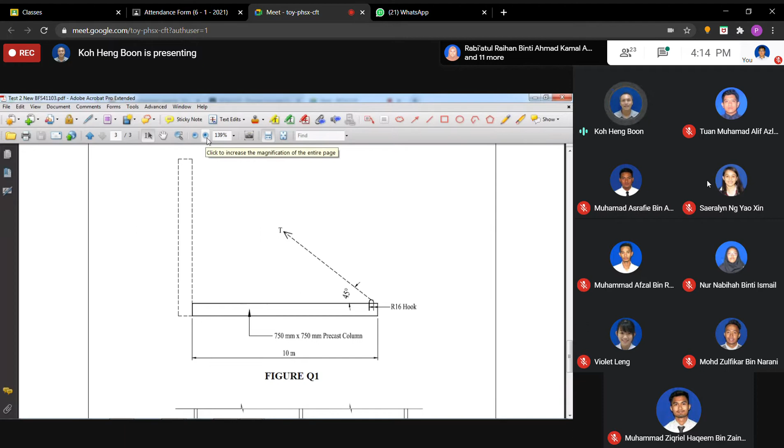Question number 1 is a bit tricky, you have to go back to your fundamentals to do the design to solve this problem. Okay, so look at these questions.

Question number 1, this is a precast column. At the end here, the length is 10 meter, and the size is 750 mm square.

This column, we are going to design the hook here, meaning we are going to check the hook, giving you the tensile strength of the R16 hook and also the partial safety factor.

And the column is going to lift out with a 45 degree. Suppose the hook follows the 45 degree, it would be much better, but it's okay, it's going to lift it like this one.

So now asking you, is this R16 passed or not? Okay, it's another submitted take-home quiz.

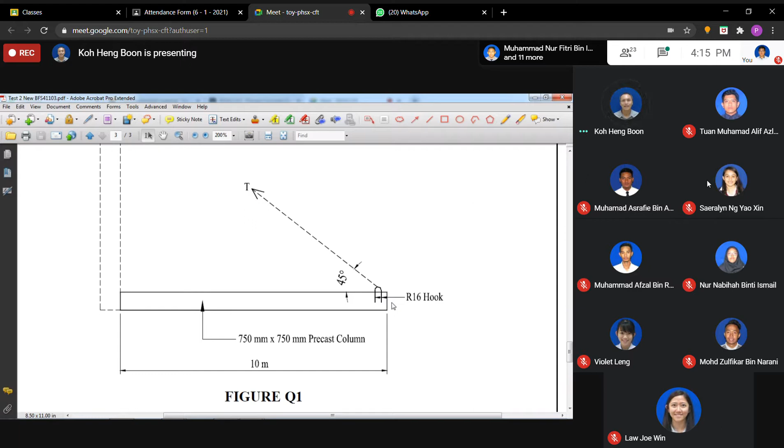Okay, so ask you to solve to get this one. So basically in this kind of situation, you need to get what is the force applied, and if you lift it out, basically this will be in tension, and there is two legs here.

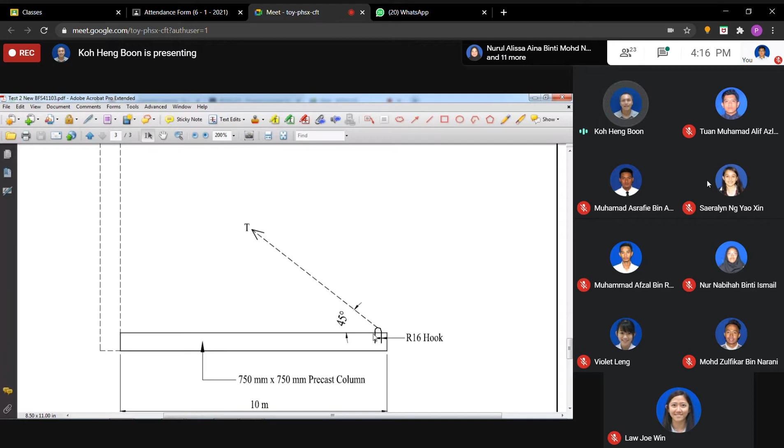We ignore all the bonding and so on. We assume the failure is on whether the tension capacity of the R16 hook is sufficient or not, and giving you the strength. The tensile strength is 250, and partial safety factor for the steel hook is 1.15.

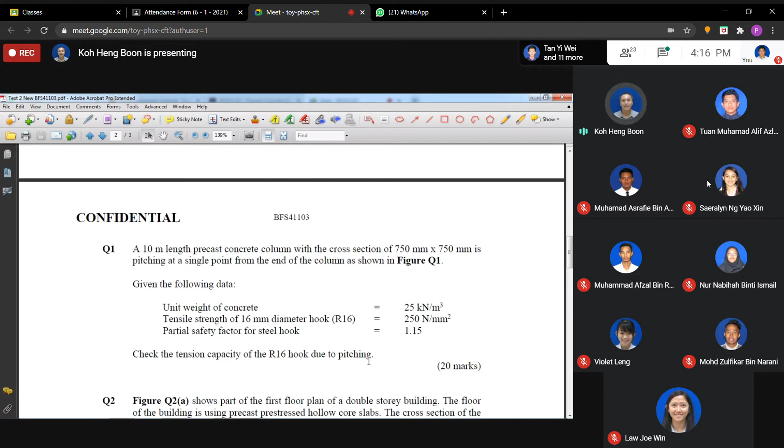Okay, so how to solve it? Actually it's very straightforward for you, and for me the solution is not very long.

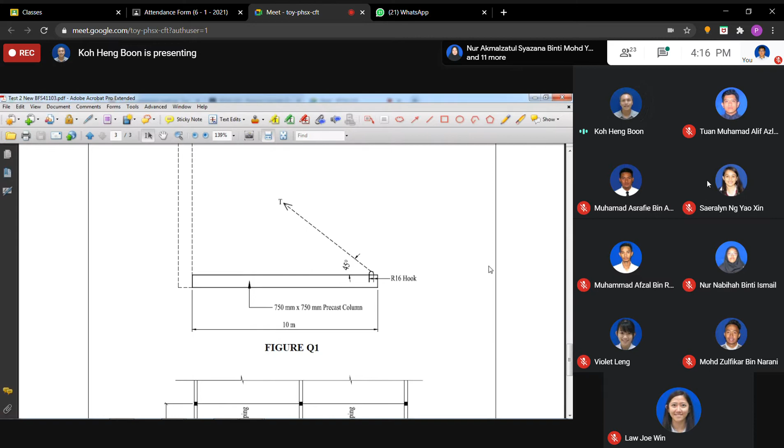So basically this one is something like if we lift it out, if we draw out the free body diagram, let me show you the answer scheme. Let me check the answer scheme for test 2.

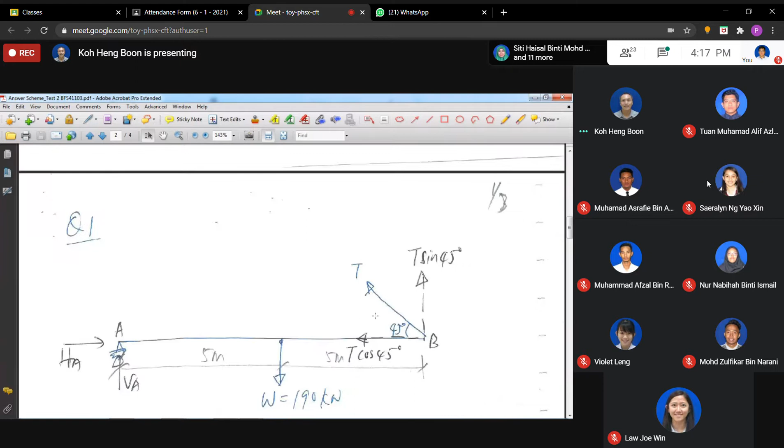So if we draw out the free body diagram, first of all you have to calculate the weight under ultimate limit state. You have 750 times 750, multiply by the density unit weight of the concrete, multiply by the length, and multiply with the factor of 1.35 for GK. So the total weight of this column is 190 kilonewton.

So in this situation, with 190 kilonewton here, and we are pulling it out at 45 degree, we want to get the T here, the tension force. We know it's in this direction, so we can derive with the components T cos 45 and T sin 45 because this is 45 degree.

Then we can use the static equations to get the reaction here. I resolve from here into 2 - resolve into vertical and horizontal components. So at the end here, basically

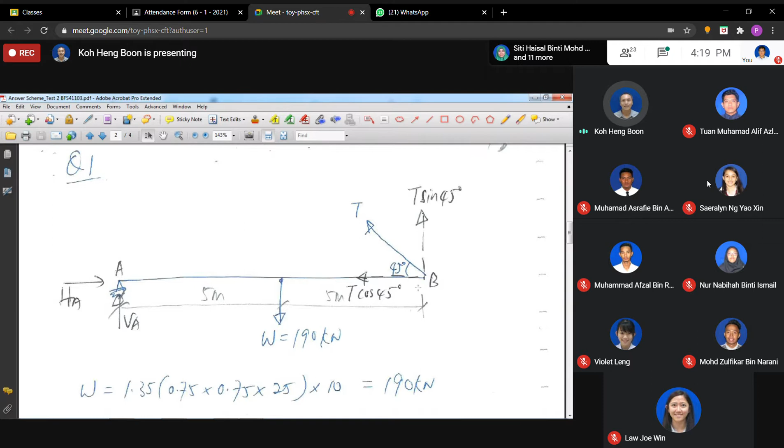I can solve to get the T. So when T is applied here, this is the force that we're going to pull it with. Whether the hook here, the R16 hook with 2 legs, is sufficient or not.

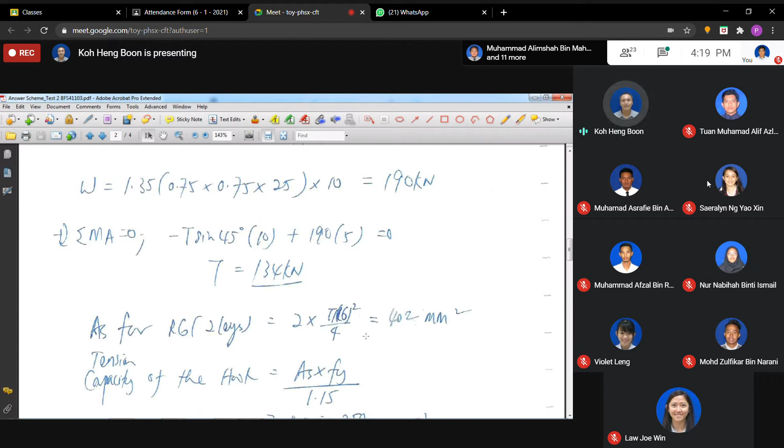So we give you the strength, so you have to calculate for 16 mm - we got 2 legs, so 16 mm is 201, so basically it's 402, and then we can calculate the capacity, the tension capacity, which is the cross-sectional area multiplied by the strength divided by the partial safety factor.

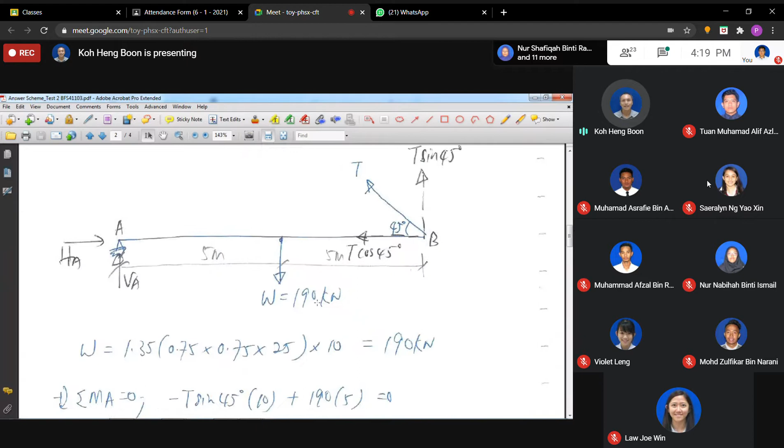So you look here, the capacity is only 87.4, but the tension force that we're going to lift it out with is actually 134. So basically it's not pass, it's not pass. Okay, so this one goes back to the fundamentals, giving you some idea.

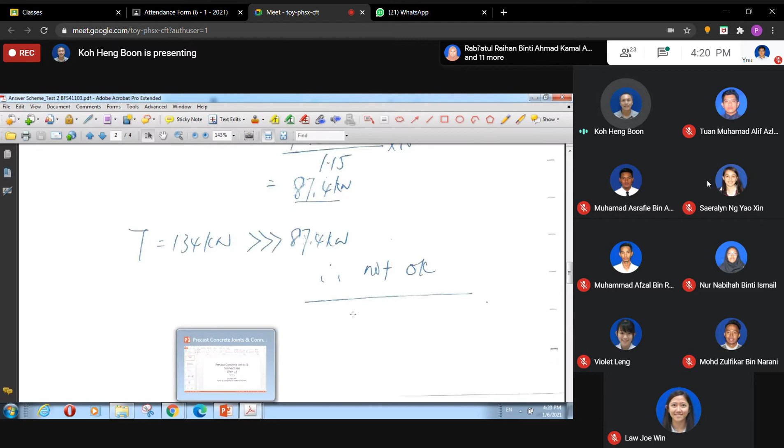But the second question I haven't prepared because I already changed the questions. So this is test 2, the solution of the first question.

So now we continue with our lectures of last topic - precast concrete joints and connections.

Okay, you look at precast concrete. Precast concrete, you look at the elements, basically is something like puzzle by puzzle, pieces by pieces. Then after that, we are going to join it. Therefore, the joint is very important in precast concrete constructions.

Okay, the joint, the connection is very important. We will make sure that you're able to join. For example, let's say in between the column and the beam, how we're going to join it. Okay, between column and column, between the precast column to the foundation, how are we going to join it?

And if you design the column to the base as fixed or pin, then you need to provide the type of joint accordingly.

So the purpose of the joint is to transmit the forces between the structure members. It means that if it's a secondary beam to the main beam, we have to make sure that the connection between the secondary beam and the main beam is able to transmit the force from the secondary beam to the main beam.

Okay, if between the beam to the column, you have to make sure that the joint you make is able to transmit the force from the beam to the column. So this is one of the main functions.

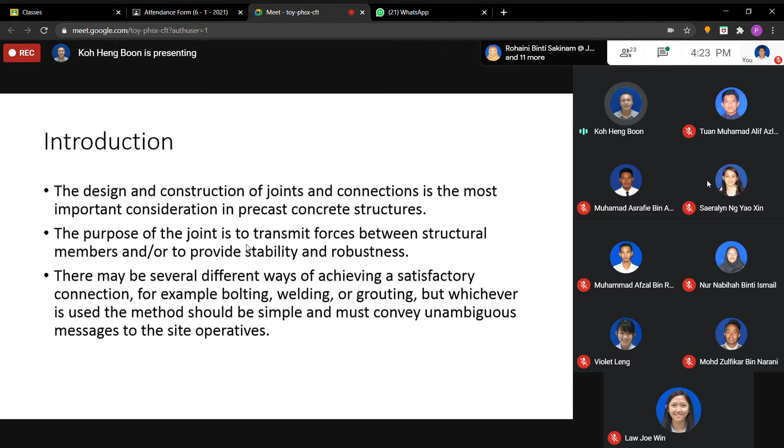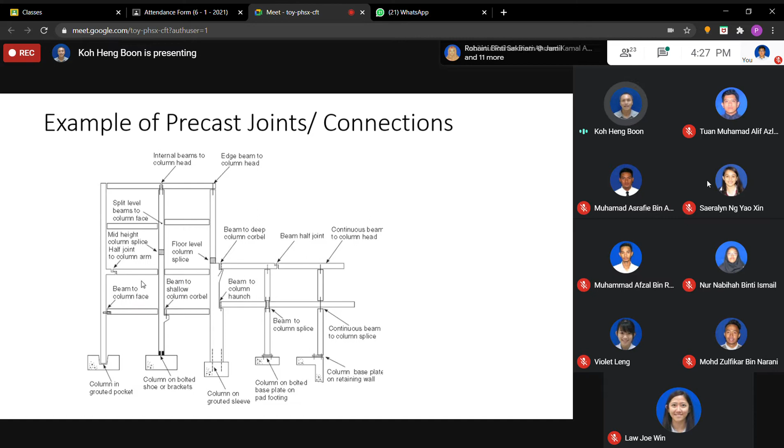So now these are a few types of joint connection. So now we look at, if that's say, the bolted column to column connection, how it looks like. Okay, we're using the base plate, and the reinforcement is something like this.

Let me check if I got anything important or not.

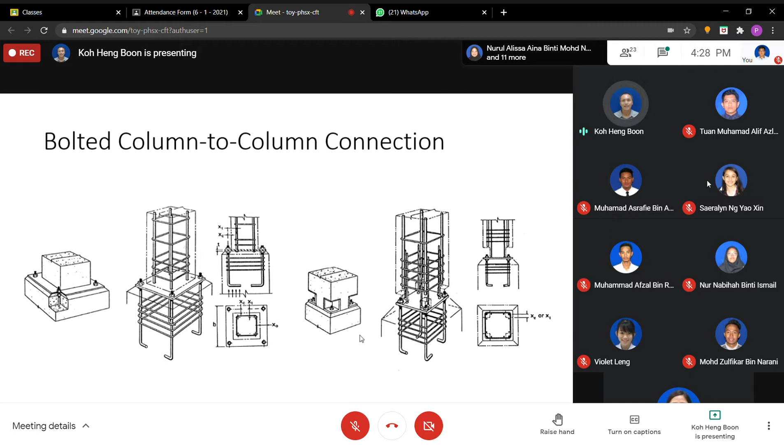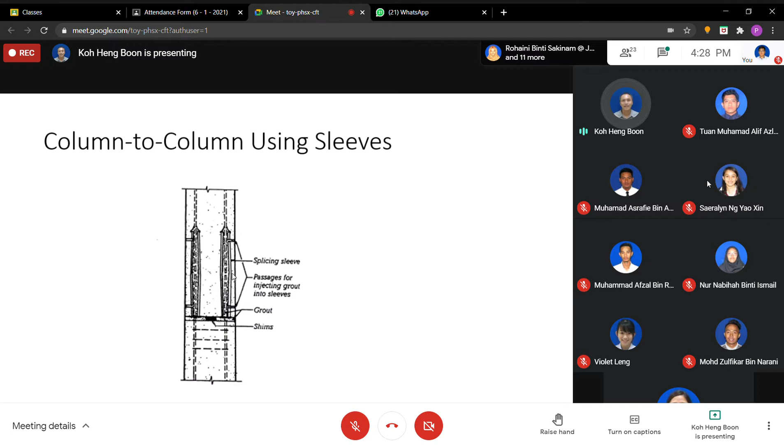So something like this, this is a base plate, so we can look at how it is we make it. And between the column to column, we're using the sleeve. Basically we insert the sleeve in, then we can grout it. Then beam to column connection, this we're using metal connection and so on.

Then using corbel, if let's say sitting on a corbel. Okay, if let's say using pre-stress and so on, post-tensioning.

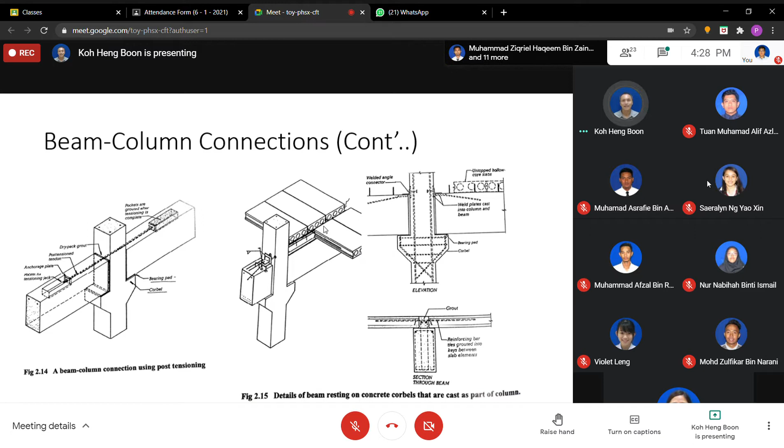And there's another one, actually we call it nibs, especially for the precast slab. The precast slab can sit directly on the precast beam, but if they want to make the same level, we can project a short cantilever from the beam, and this short cantilever is going to support the precast slab. So that part we call it a nib.

Yeah, that one is in our syllabus. Next week we'll study it, we'll look at how to design it. It's just a short cantilever, not very difficult to design. That one is very straightforward.

So if the beam to column is directly sitting on top, we can just slot it in. Here there is a bolt or bar, then there's a hole here. We can directly sit it on top and provide a bar here.

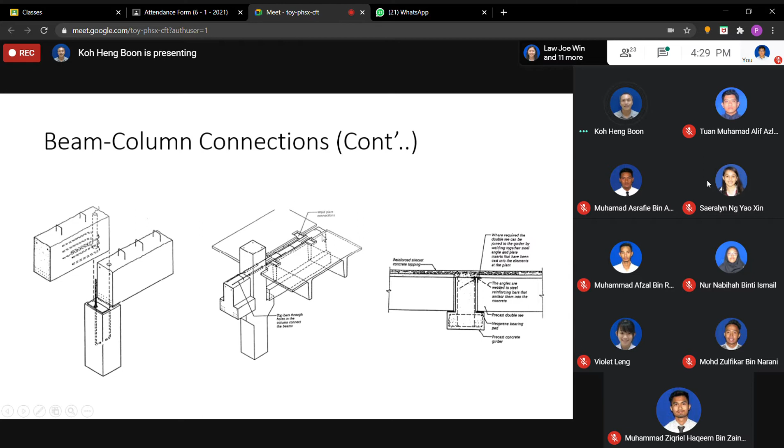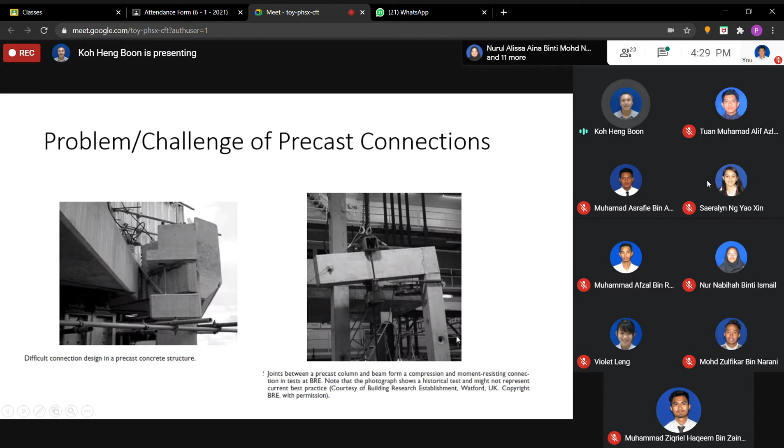So we look at some problems or challenges of precast concrete connection. Sometimes it's very difficult, especially when you've got a few types of these precast elements, so the joint becomes very complicated. And sometimes it's because of not proper design, so if it's subjected to any load during installation and so on, it may have some failure happen.

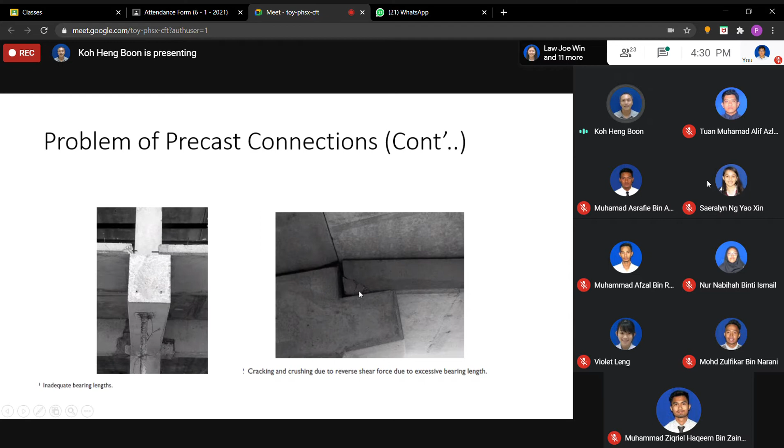Okay, so now we look at the forces of precast connections. Actually today maybe not very long, the lecture target is just to cover the first part only. However, if we have extra time, we can discuss a bit of the second part, maybe not touching the calculation, just looking at some theory.

So if you look at the connection here, for example this connection, this is a column. We have a short cantilever come out, then there is a bolt here, and this is the beam, you can consider this a beam.

Roughly, basically you will see this will be under compression. If the load is applied here, this will be under compression. So on top, this part will be under tension. Therefore, the joint, the connection here, the behavior you can predict.

You should understand the behavior is almost the same as the connection in steel design. When you apply the load, how it looks, how it's going to behave is important. You have to know whether it's compression, tension, and whether it has shear and so on. You have to understand, then you can design for it.

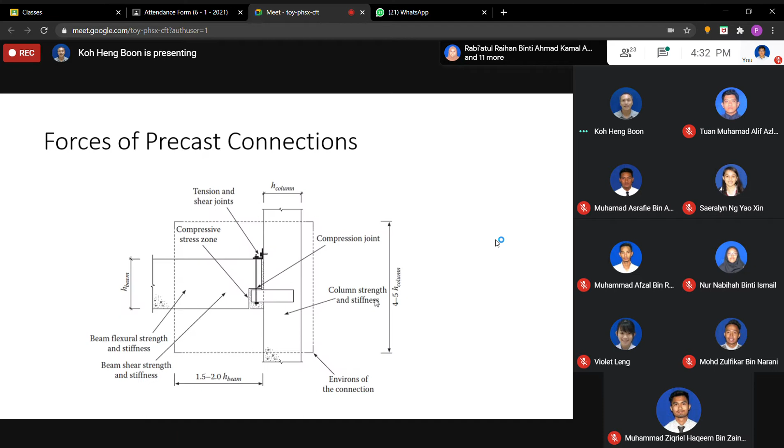So now, today the target here is design of the bearing. I will show you the example here based on Eurocode 2. But actually, initially I was trying to prepare the example in BS 8110 because BS 8110 is very straightforward for the bearing.

I have included that in the notes. Sometimes I don't like Eurocode 2 - why? Too detailed here, in this case too detailed. But however, actually we can simplify. If you look at BS 8110, actually it's very straightforward, very straightforward. But at the end, you'll get about the same result.

So basically, if you look at bearing here, for example, let's say this is a column, and here a cantilever comes out. Whether this is a corbel, or it can be a nib, or it can be a haunch. Our concern is what is the length here that we need to provide - the bearing length that we need to provide here.

So basically, what to say, I don't know whether this one is correct or not, but this LB is supposed to be from the edge here to here. But never mind, it's okay. So basically, it's based on here. We are required - yes, it's here. This is a gap. The bearing length here.

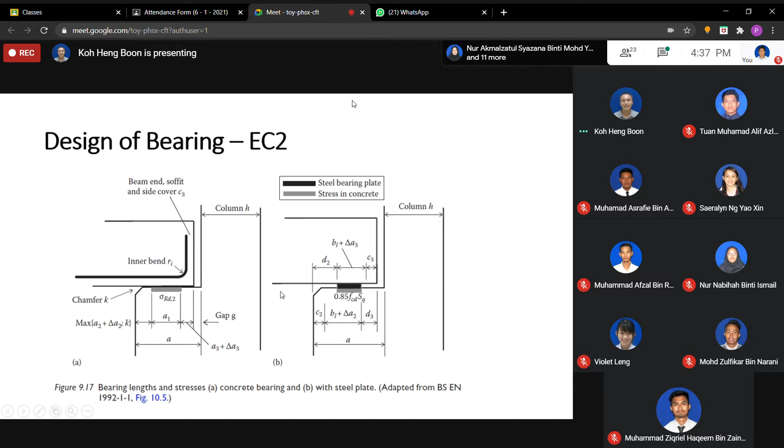Okay, the ultimate bearing stress. Imagine the precast elements, when put sitting on the supporting elements, produce a stress here. The stress basically is the reactions of this precast element divided by the effective bearing length.

Just now we said effective bearing length is A1 plus A2 plus A3, plus delta A. We get the effective bearing length, multiply by the net bearing width, multiply by the width. So force divided by this becomes an area, is it? The bearing area, huh?

So we get the ultimate bearing stress, and this ultimate bearing stress must be smaller or equal to FRD. What is FRD actually? FRD is the resistance, basically. This one is the applied bearing stress, so FRD is the resistance. The resistance here, according to Eurocode, is equal to this for dry connections.

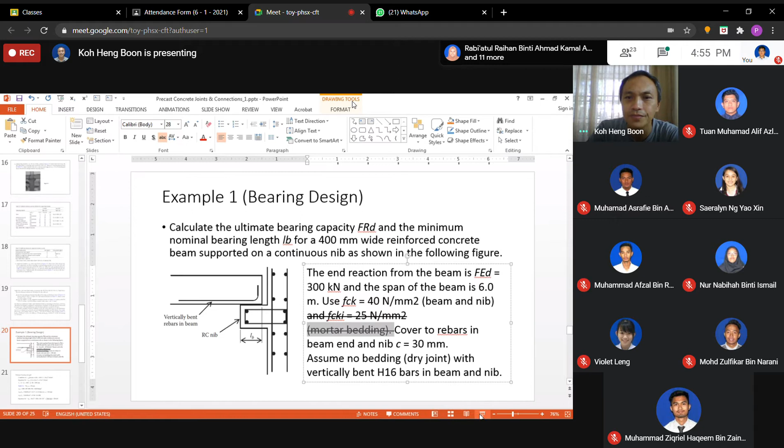Okay, and concrete cover 30 mm, no bedding, dry joint with vertical bend 16 mm, vertical bend 16 mm here, in beam and nib. So we want to calculate the LB.

Okay, so we calculate the FCD. FCD is FCK divided by gamma M, the gamma M is 1.5. Actually, you can directly calculate the FRD - FRD here is equal to what?

0.266, is it? Because it's 0.4 multiplied by FCD. 0.4 divided by 1.5. FCD is FCK divided by gamma M, gamma M is 1.5, so it's 0.4 FCK divided by 1.5, or 0.266 multiplied by FCK, so you get 10.67 megapascal.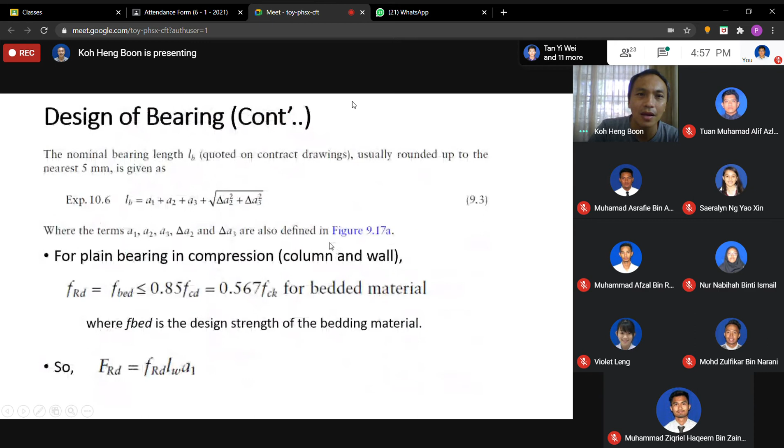This is the FRD, just now this one - FRD 0.266, okay, 0.266 FCK. Roughly you get this value, 10.67.

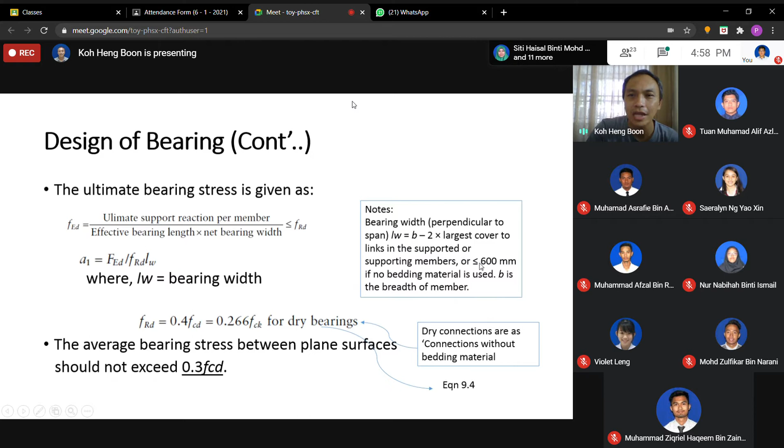And the bearing width, just now I mentioned is B minus 2C, or 600 mm, whichever is lesser. B, the beam width is 400, concrete cover is 30 mm, so 400 minus 2 times 30 - this is given here. The bearing width is B minus 2 times the larger concrete cover, or 600 mm, whichever is lesser.

Okay, so we get the LW, 340. Now after this, we try. This is a stress calculation. The force is 300 kilonewton. So 300 kilonewton divided by, you want to calculate the stress, the bearing stress. 300 divided by what? By the width multiplied by A1.

Let's say we try A1. So in this case, you try A1 equal to 90. If you try 90, basically the stress you get is 9.8. Sigma ED here is based on A1.

It's based on A1 to calculate. So then after that, you calculate sigma ED over FCD, means 9.8 over FCD is 26.67 here. So you get 0.37. Actually, you try to counter check: if we are based on 90, sigma ED over FCD is 0.37. Is 90 sufficient or not?

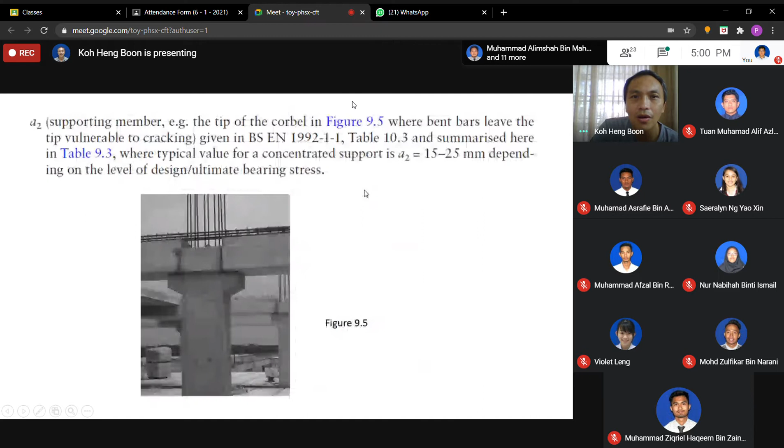So it's in between here. Okay, so now we try again using 110. We use A1 equal to 110 now. So, not pass with 90, we try 110. What is the value of sigma ED? You should get 8.02.

So how to get 8.02 is basically 300 kilonewton divided by the bearing length LW, 340, multiplied by A1, 110. So you will get 8.02.

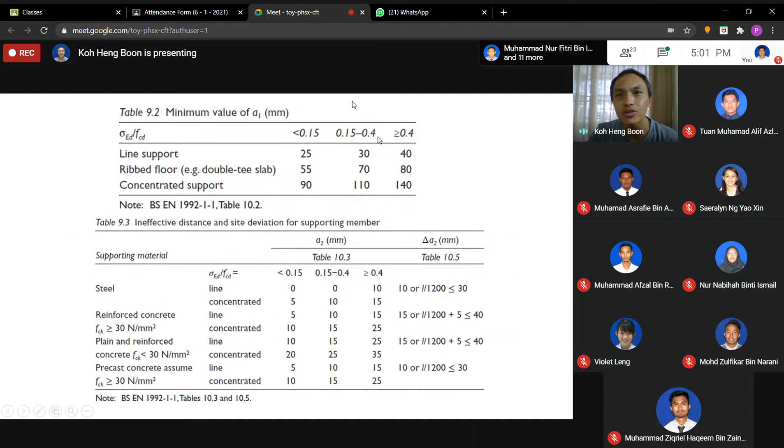So sigma ED, you get 8.02, divide by FCD, then we check again, we get 0.3. So 0.3, 110 is between what? 110 is between 0.15 to 0.4. So 0.3 pass, it's in between here, so we can use A1 equal to 110.

So A1 we got already, 110. And then we can calculate again to show it pass. So we calculate again the resistant capacity. This is FRD, multiply by the area, we get 399, which is greater than 300 kilonewton. So it passed basically here. This is the ultimate bearing strength, we check for the ultimate bearing strength.

So the next one is we are going to get A2 and delta A2. Is it this one, 8.02 divided by 26.67? Okay, so now we go for table 9.3.

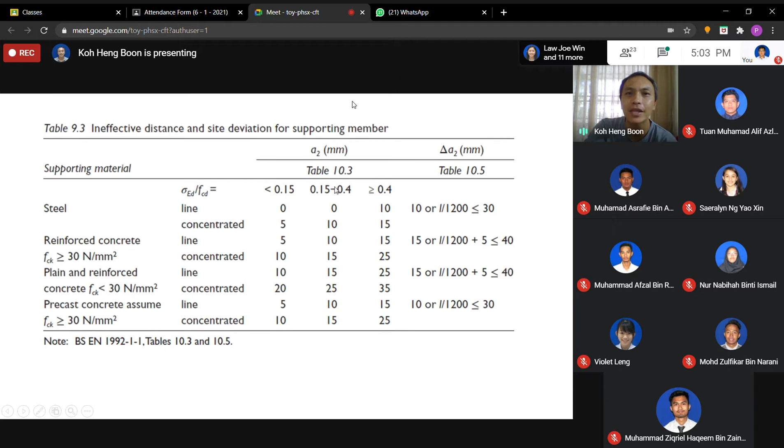Now we go for table 9.3. So basically table 9.3 here, concentrated load, and FCK is with 40 greater than 30, concentrated load. So basically it's 0.3, is it just now? Sigma ED over FCD is not 0.28, I think just now I made a mistake here.

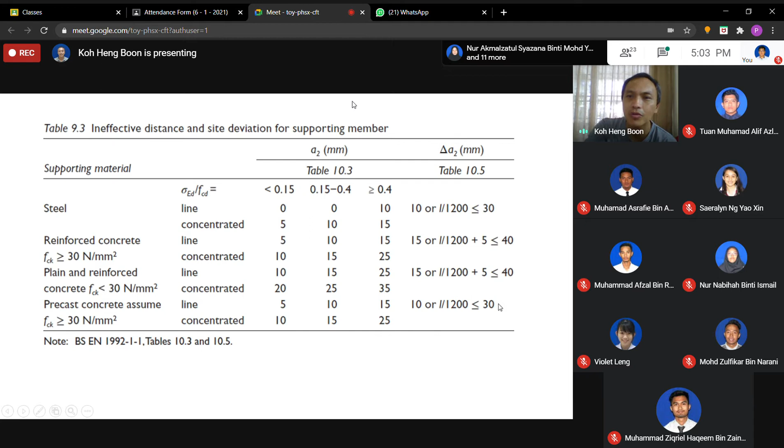0.3. So in between here, actually what you need to do is the A2 value is 15mm. Then delta A2 is 10, or L over 1200, must be less than or equal to 30mm. Okay, so now we go and calculate.

So A2, how to get 15mm from table 9.3. Delta A2 is the maximum of 10, whichever maximum of the value 10 or L over 1200: 6,000 divided by 1200 is only 5mm. Between 10 and 5, so 10 will govern as the maximum value. So delta A2 is 10mm. We got the delta A2 already.

Now left only the A3 and delta A3. A3 here, you have to refer to table 9.4. The vertical bent bar is 16mm just now given. So basically we refer to table 9.4.

For concentrated load, is vertical loop reinforcement. We are actually using vertical loop reinforcement. So basically C plus R. C is the concrete cover. R here is the bend, roughly 2 diameter. So the bar is 16 mm, so 2 diameter is 2 times 16. So C plus 2 times 16.

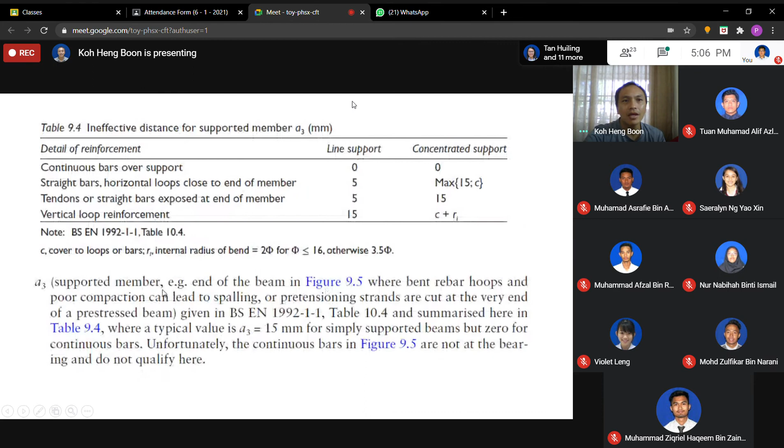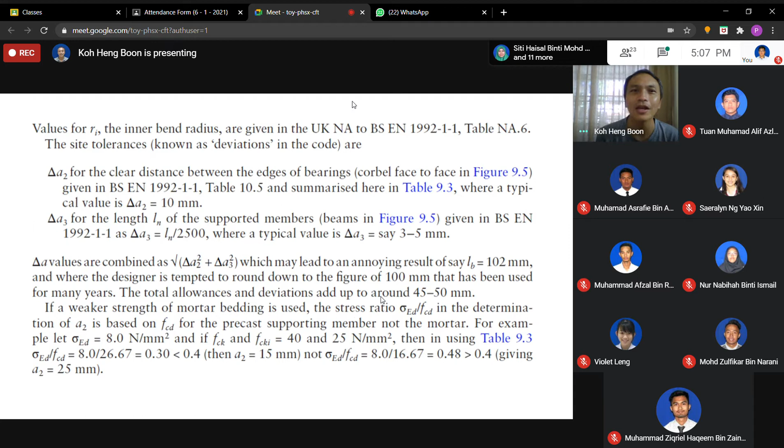Important here is delta A3 is equal to Ln over 2500. In this case they assume that the Ln is 6000 plus 150, so 6,000 plus 150. So therefore it gets, I think so, you get 6150 with it.

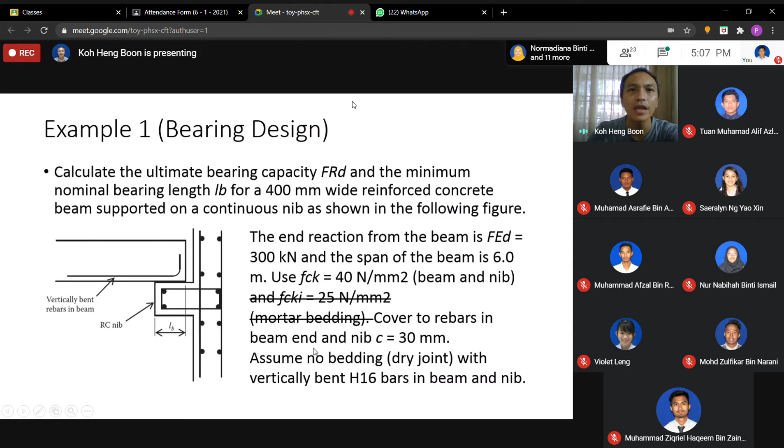for the A3, ready. Now A3, delta A3 is the length of the beam, but just now I mentioned 6 meter, is it, but there's a plus 150 mm. We assume you extend a bit. Say that this one is 6150, it actually is plus 6000 plus 2lb over 2.

So it assumes this one is say 6150. We don't know actually the bearing length yet, but it's assumed to be 150 mm. So it's 6000 actual, then plus 2lb over 2 means both sides, divide by 2 center to center, you take it effective. So assume this lb is 150, therefore you get 6150 here. So delta A3 is Ln divided by 2500.

2500 is fixed, so we get 2.5 mm. So delta A3 is 2.5 mm. So now we already got A1 is 110, A2 is 15, A3 is 62, and delta A2 is 10, delta A3 is 2.5.

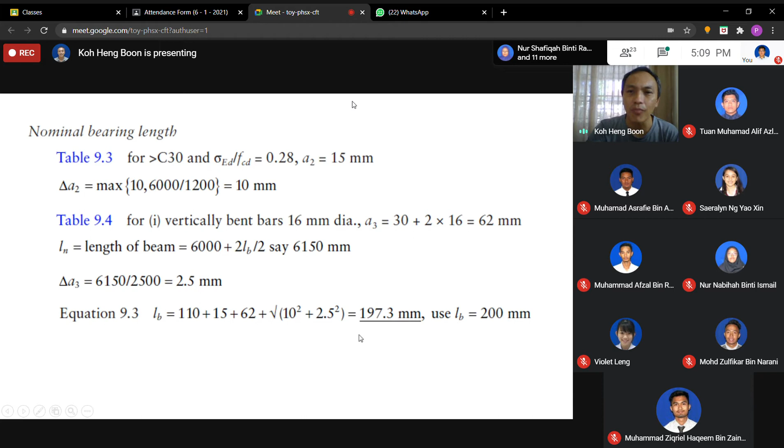Means that the LB that we need to provide here is 200 mm. So, the Q&A a bit - do you get it, class? Understand or not, class? Can you get it?

Okay, so this is the way how to calculate the bearing length according to Eurocode. For me it's a bit like complicated, you look at it, but at the end it's to get the A1, A2, A3, delta A2, delta A3 to calculate the set delta A. It looks complicated, actually it's not that complex.

Okay, so now let's look at, if using British standard, this is what I prefer. How we're going to do it. Just one slide, actually - you understand Eurocode 2, actually if you go to use the British standard, it's much simpler. Okay, you look at the

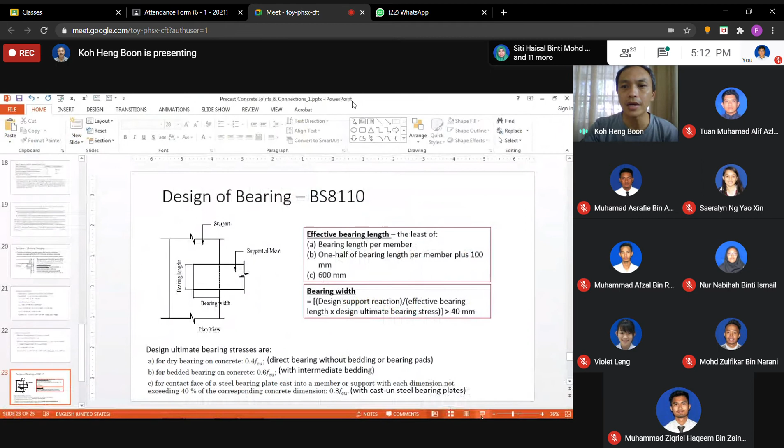So now if we look at British standards, how it's going to do. Just now, the length, the bearing length is this one. This is the plan view. This one is a supporting member, and this one is a supported member. Okay, something like that. Say this is can be the main beam, this is a secondary beam. So this one is the width.

Just now we named this one as a length, LB, is it? Still remember? This is LB, and then this one is LW, the width. But however here is opposite way - we name it this is the length and this is the width. So the length here, which is just now in the Eurocode 2, is the width, is the member size here, minus 2C, or 600 mm, whichever is lesser. However, in British standard, it's like this - it's also the least of the minimum value between these three parts.

Bearing length per member means this dimension without minus 2C, or half of the bearing length per member plus 100 mm, whichever is lesser. So it's very straightforward - if this is 300, you just take 300, no need to minus 2C.

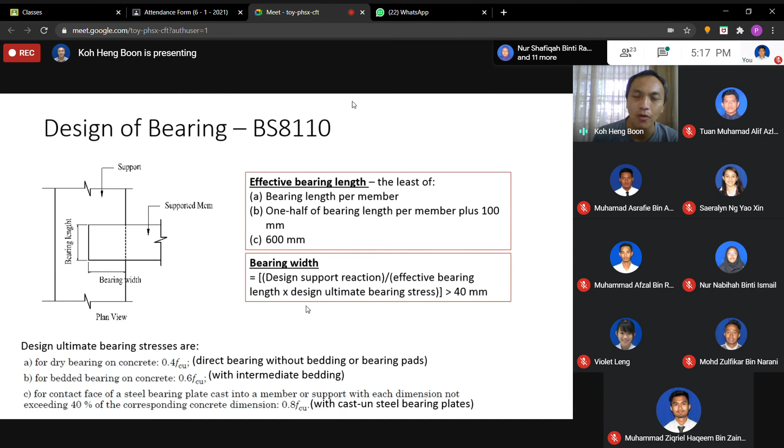Okay, another type of joint that I have added here, I did not provide the calculations. They're actually in the joint - if you look at precast concrete design, joint here, actually there are many types of joint. It's a very huge topic - if we really want to study it in depth, we can discuss many types of joint.

But I just selected a few that I think are important, especially for the bearing, for the corbel, nibs, and maybe also the half joint.

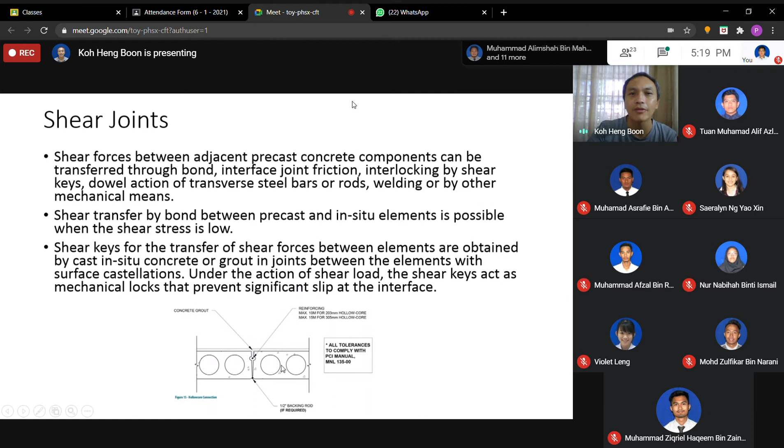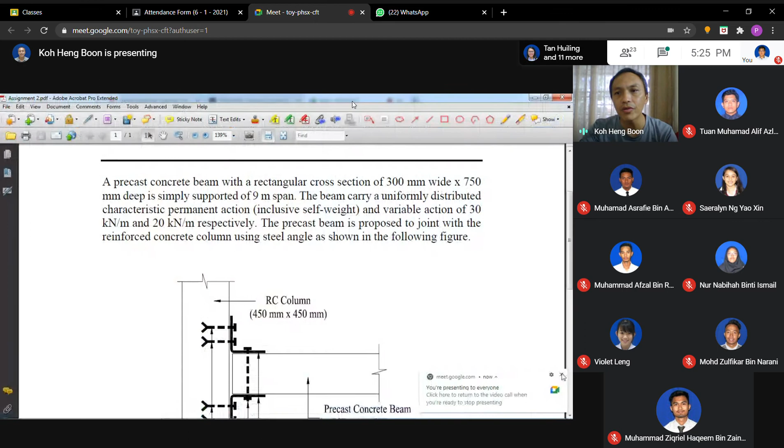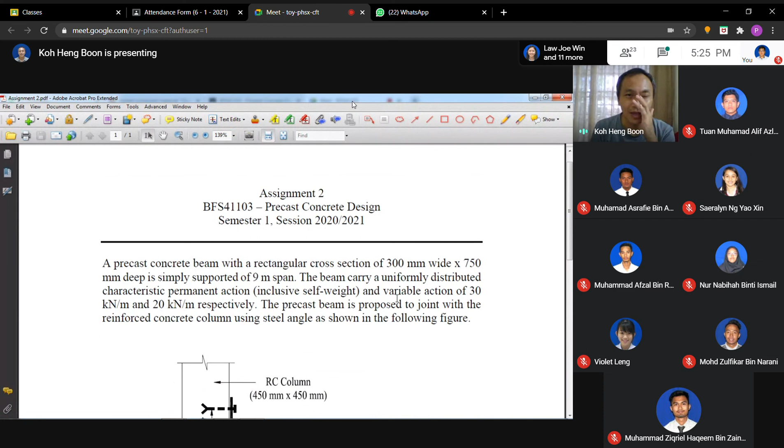Okay, so now we look at the assignment. I prepared this yesterday. Something like this, just look at it like this.

The column size is 450 by 450, but the column size is not a big issue. The beam is a precast beam, the depth is 300 by 750 - 300 is the width and 750 is the depth.

That says this is the connection, but it's not really practical. We are going to combine using a steel connection to support this beam and join it to the column.

I propose something like this. We have bolts - one or two, I don't know, you are going to decide. This is just an idea, something like this, just an idea.

Okay, so this is a side view. But not necessarily only two - this is only the side view. It can be one, two, three, or four. If you view from here, how many we don't know.

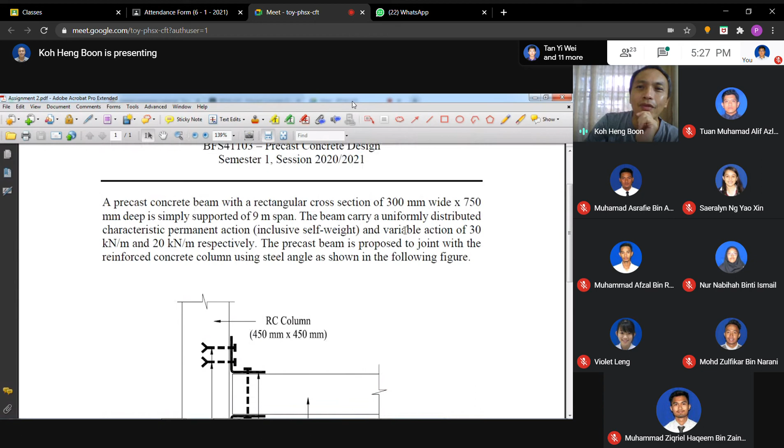This beam here has a length of 9 meters. You can assume from here to here is 9 meters. The beam carries a uniformly distributed characteristic permanent action, meaning GK and QK. GK is 30 kilonewton per meter and QK is 20 kilonewton per meter throughout the whole span.

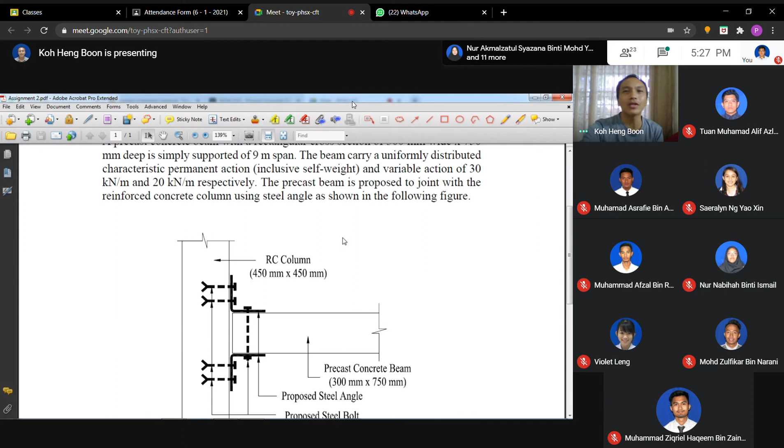And the GK already includes the self weight of the precast beam, so 30 kilonewton per meter.

So now this is a proposed joint connection that you are going to use an angle. This one is the angle - I don't know what is the size of the angle. On top they are also going to have an angle, maybe using the same size, but you are going to decide what is the suitable size.

Concerning a few criteria, you have to know what is the force, based on ULS already. The joint you have to design based on ULS - ultimate limit state.

Then after that, you have to know if both sides are the same. You have to do some analysis to get what kind of forces are here. It is not rigid - basically it is not rigid, it is a simple construction.

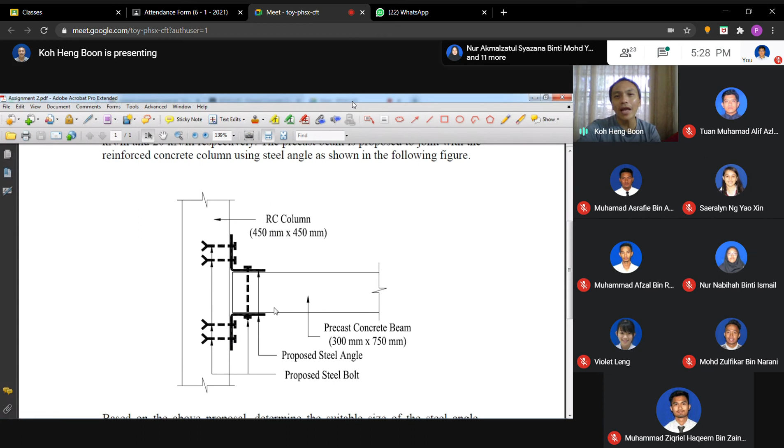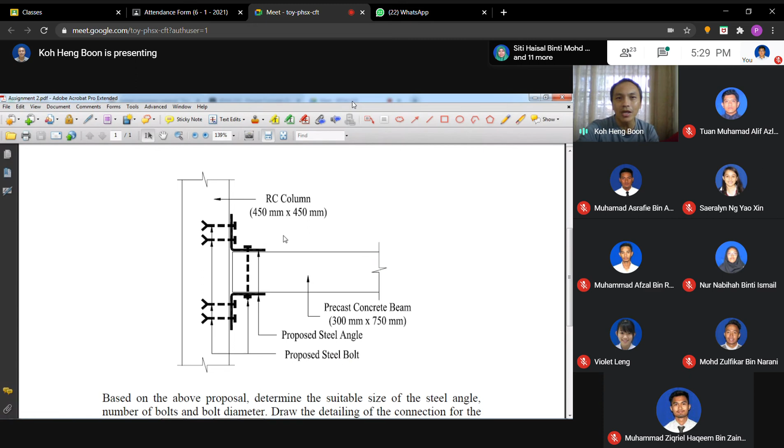So you need to get all the sizes of the bolt - the angle here, how many bolts here. I just propose and simply draw how many bolts. So you have to design, come out, and prepare the detailing - more detailed detailing with all the sizes, side view, so you cut from here, how it looks like, and so on.

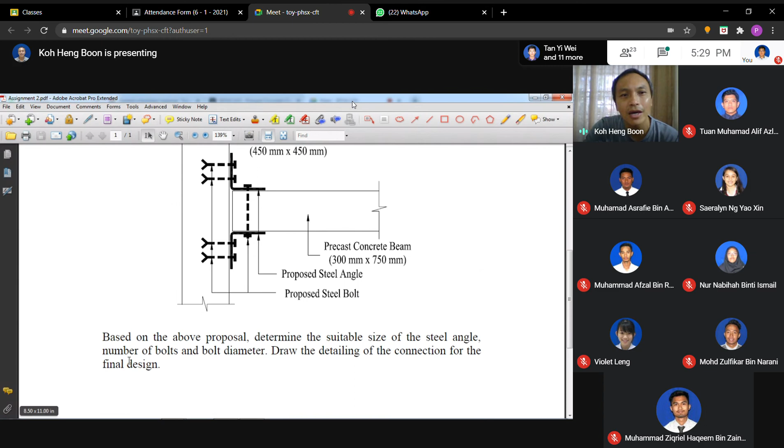Okay, so this is the assignment. Can you get it? Based on the above proposal, determine the suitable size of the steel angle, number of bolts, and bolt diameter. Draw the detailing of the connection for the final design.

The problem is here, why doesn't it go down? I just have to fix this one.

Okay, so we look at part 2. This one focuses on beam to column connections. Beam to column connections - look at this picture here, look at A here. Let's say you want to have a hidden connection here.

So basically, a hidden connection means you can't see the connection - it's not extended, it's like part of the beam. What we can do is design the beam as a half joint, cutting it like an inverted L shape, a half joint sitting here, like a short cantilever. So this becomes a hidden connection.

Then B here is visible - if we use a haunch or a corbel here, it's visible. It depends on the type of building. Hidden connections will surely look nicer, but effectively I can say the corbel is more effective because we don't reduce the sections of the beam or the slab and so on.

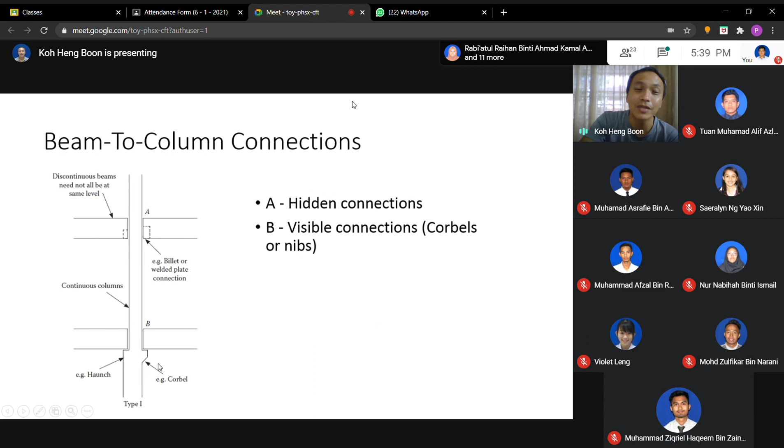This is under Eurocode 2. Basically, if we use the strut and tie method, this part will be under tension and this part under compression - we'll look at it later, but I'll use a more simplified way to do it. It's usually used extensively in situations where the visual aesthetics of the connection is not important, meaning since it's visible, aesthetics isn't a major concern, so we can use a corbel.

And reinforced concrete corbels can be classified as shallow corbel and deep corbel. For a shallow corbel, the distance to the effective position of the load action is called AC - and this is also related to the shear.

What is it already? Shear length, is it? I think it's shear length.

Okay, AC. This one is less than or equal to 0.5 HC. HC is the overall depth of this concrete corbel. So AC is less than or equal to 0.5 HC.

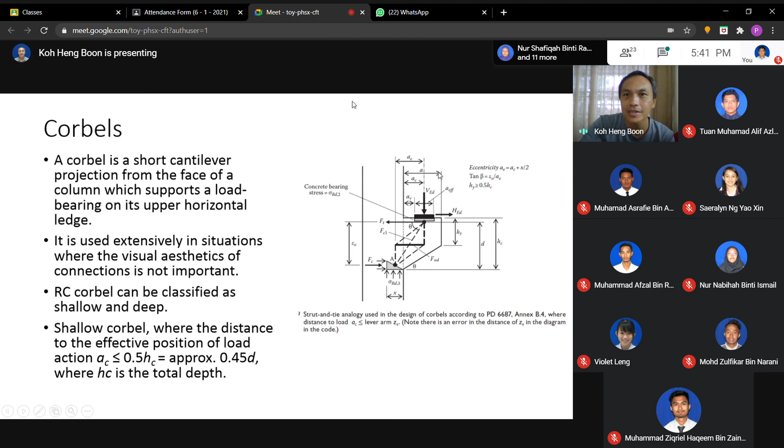So the ledge length here, A is less than or equal to 0.7 HC. So what is A? This is the ledge length. A is the ledge length here, the total here is given some guide actually based on some guide FIB 2014.

A is less than or equal to 0.7 HC, and AC is 0.4 to 0.6 D roughly. And AC is less than or equal to HY also. These are the sum of the requirements, based on this standard.

So when we propose the dimension of the corbel, these are the things, these are the things.

So if the dimension is not comply, the short cantilever is not comply some of what I mentioned, you will become qualified as a nib. The width of the corbel must be less than about 500 mm, otherwise it's qualified as a nib.

After this, we'll look at the nibs here, how design for the nibs. So this is called shallow corbel, and this one is the deep corbel. This is about typically, this height is half. Usually we propose this half.

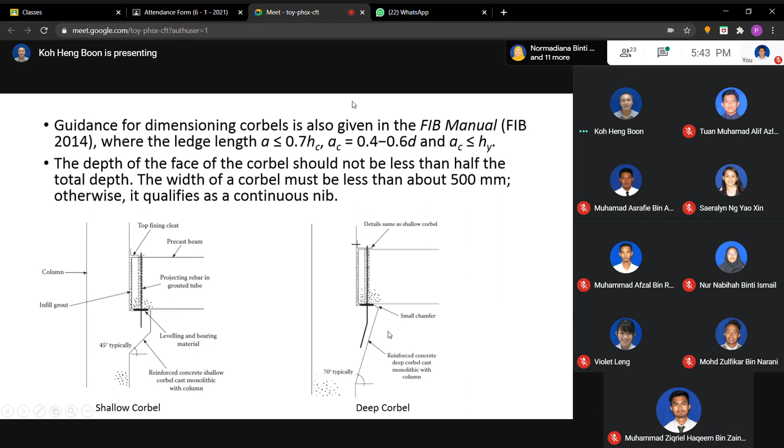So you look at some picture. This one is a single side, one side corbel. And you see the reinforcement actually inside here, inside the corbel, the reinforcement, how the detailing here, get some idea.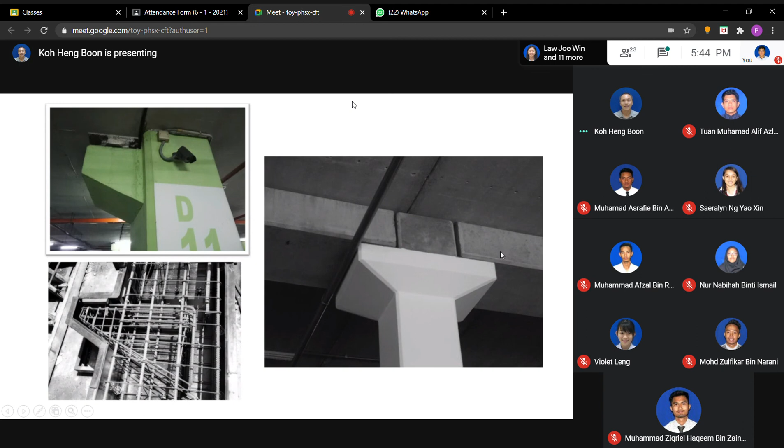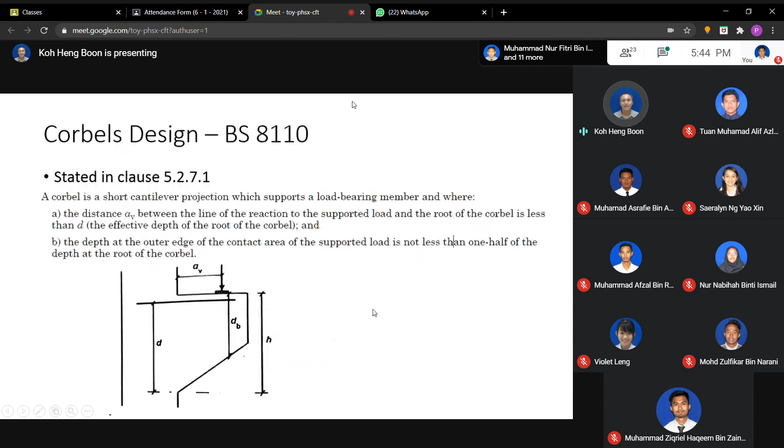That's for both sides. So I think for the coming one, we are going to discuss how the design. We got the example after this, so all this we will discuss later. We have to refer to the handout and then we will design for the nibs.